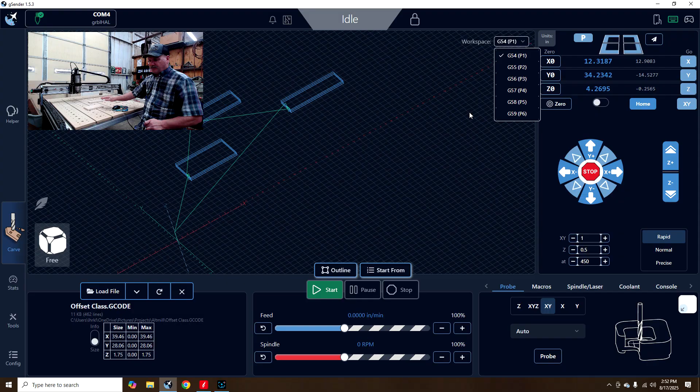And I went ahead and set these all that way. I do not recommend doing that, because if you forget to turn this back to G54 or something, it's just not real good. And my post processor is set to use G54. I do believe in having that called up in your G code, and I'll try to remember to go into that in a minute. But for now, the easiest way to go to a position that you want to use a lot, I have a couple of macros that I've set.

You can use the jog functions to do the same thing, but when you home your machine, you see these gray numbers right over here. Those are your machine position, meaning from home. Has nothing to do with your G54. You set that anywhere on the table that you want to zero that one, which is in this case on G54. So when you home the machine, you just push home.

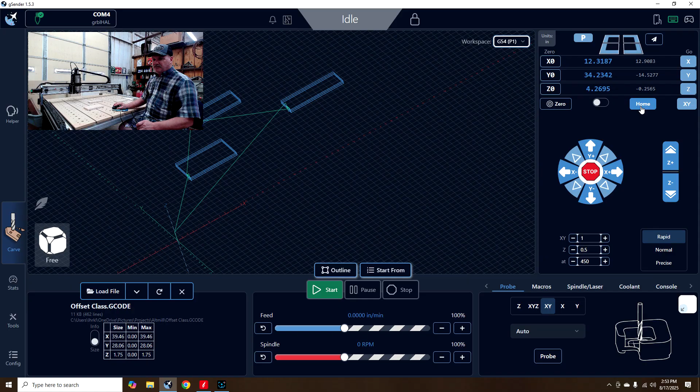I've already done that. I guess I'll do that again and show you. And those sensors may not exactly come back to where they were. Now, everyone thinks that's just super accurate and everything. I've found it to be maybe accurate within 5 or 10 thousandths, and it depends on what tool you have in there.

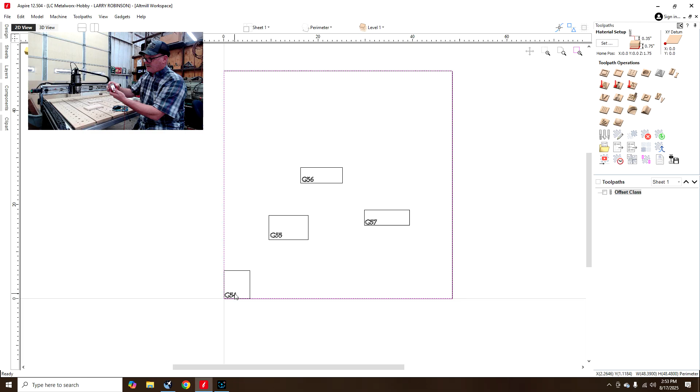I wrote my machine position down here in this lower left. I have it drawn, and let me show you real fast. I've got it opened up down here, and these are the little blocks that I've got set up here that we can call 55, 56, 57 for this example today. And G54 is down here where I was setting the lower left corner, and that's why you use the auto zero touch plate. You can set any of those or check them anywhere you want on this table.

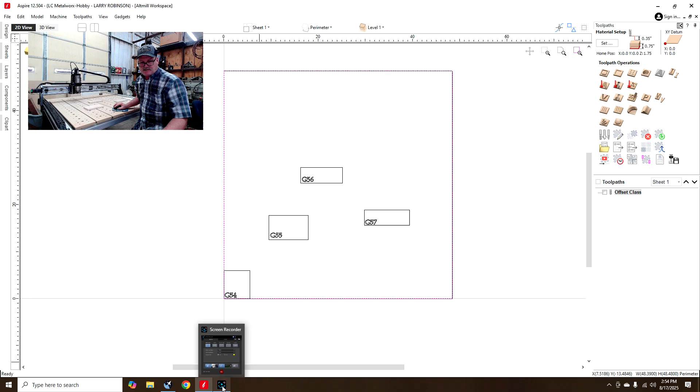And this one here, I already know where this is. But if we rehome the machine, it may or may not come back to these exact numbers, and I'll show you those now. Let's go back to gSender and go through this. Alright, so let's just push home right over here, and let the machine home. It'll normally remember where your zeros are even after you home, even from the day before, but I wouldn't necessarily trust that 100%. So notice when it homes, these gray numbers over here go to 0.

So that is your machine position, 0. So when it's at home, in all three axes right there, those are machine position. Now, I can call a G53, and that will move from a machine position. A G54 will be from wherever you set your G54. Right up here, see where it says G54 and 55 and so on. Those are work offsets. Okay? And that's what your G code is working off of, is your work offset.

Now you could always zero everything right there on your machine. I don't like to be on my limit switches working off of that. Things cannot be right. If you have some soft settings in here to where it doesn't allow you to get close to those areas, you could run into problems. I don't recommend doing that. Some people do, and they use that for their zero, and that's up to them. Everything's up to however you feel comfortable running it. I just want to show you how this all works out.

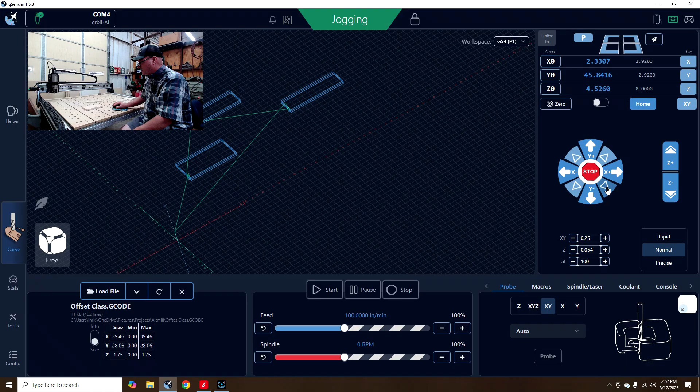48.762. It's exactly what I have written down, so it did repeat. And so you can trust that. So what I would do is just pull this off of the switches over here. I'll just move it, jogging around manually, keeping the Z up to a safe height.

Now I can set macros in here, and I can move to any position I want to if I've recorded these numbers like I have here and written them down. So that's probably the best and the easiest way if you want to move to a position. So in this case, I've moved in here and I just skimmed these around. I made a code to do that, but it was based off of this position, but I still could find those positions. So let me show you.

In this case down here, I've got a macro, so let's pull the macro list up. See the one where I put table 0? And if I click these, I can go in here, and this is where you can write that. It's a G code you write in here.

And I know people don't want to know about G code, and they think that I overdo G code. If you don't understand a little bit of G code, you're going to have trouble with running your machine and understanding how it works. That's just simple as that, and it's very simple to know just a few G codes to do this. So in this one, I'm running in inches. If you're running in millimeters, it's almost exactly the same.

I can tell you the differences, but in this G code I've got G0, which means rapid move. G90 means we're going to do an absolute move. So that means it's going to be an absolute measurement from that 0 up there to here, not a relative from where I'm at right now. So yeah, I'm off there right now, but it doesn't matter. We're going to go exactly from our machine home position, not our G54, we're talking about machine home.

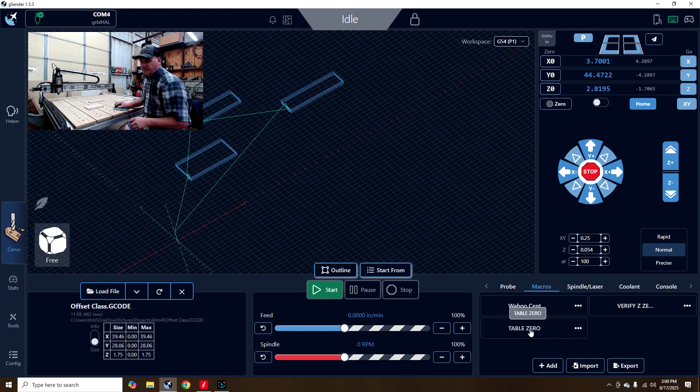Okay, now I'm assuming you can see right here. So I'm going to come down with the Z just so you can see that that really is that position. And I can see it is definitely lined up. The center of the spindle is lined up with that corner.

And if you'll notice, the grayed out numbers from home are exactly what this says right down here, 0.590 and minus 48.762, and we're not worried about the Z. We will set our Z. I like to set it off the spoil board today because I don't want to scratch my spoil board, and so I've already set it on this right now.

But anyway, that's how you move to a position. Set you a macro. Now, just because we moved it here, that didn't set our G54 to be there automatically.

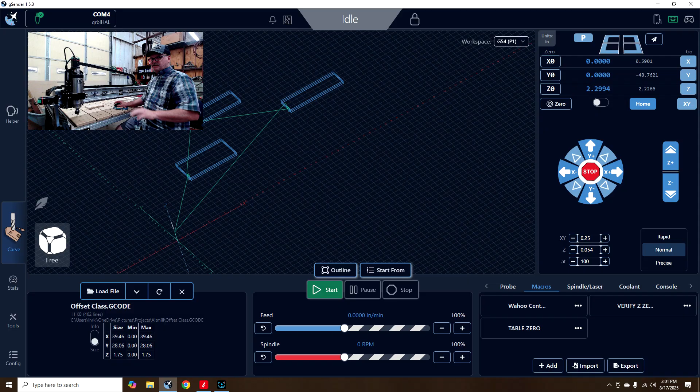Once you move it there, then just go up here on whichever work offset you want to do that on, and go ahead and click your zeros here, X and Y. And we're not going to play with the Z because we've already set that one here. So now we are set. Our G54 is set right here from the macro that it moved to.

So now, since I already set some of these other ones, I'll show you how I did that. So let's go in G55. If you'll notice, these numbers change. So if I wanted to, I could make a macro there, but I don't want to do that. I want to show you how to do that right here. So we're going to set G55.

Now, you can use G55 and some of those just to find, so you don't mess up your zero you set, because when you use this auto touch plate, it's going to set that there. You can come off of it. Just be sure. That's why I don't recommend doing this, because once you change that, you may forget to come back and put it back to G54, and when you turn this machine off, it's probably going to just stay right there the next time you turn it on. So you may not be in the same work offset that you thought you were in. So that's not a good idea in most cases to ever use G55 or any of those.

But for this example, we're going to do this because I'm going to show you how to do all that. So we're going to set our touch plate up right here. Now this is for if you need to be really critical. If you don't need to be that critical, just line it up close to that corner or the center, wherever you want to be, then record those numbers. But let's be accurate today and show you can be super accurate here. So now I'm going to line up in the center here. I know you probably know how to use this, so I'm not going to go too much in depth here. I'm going to show you.

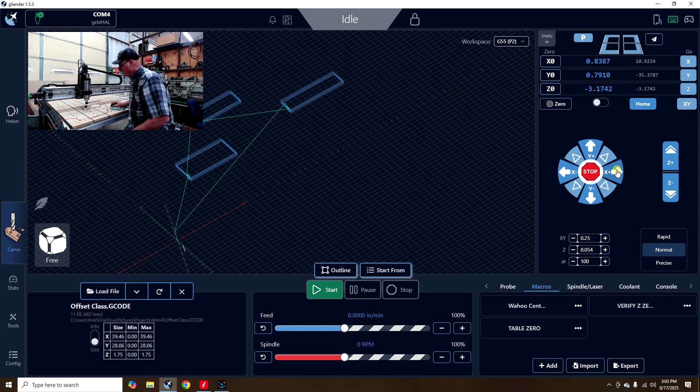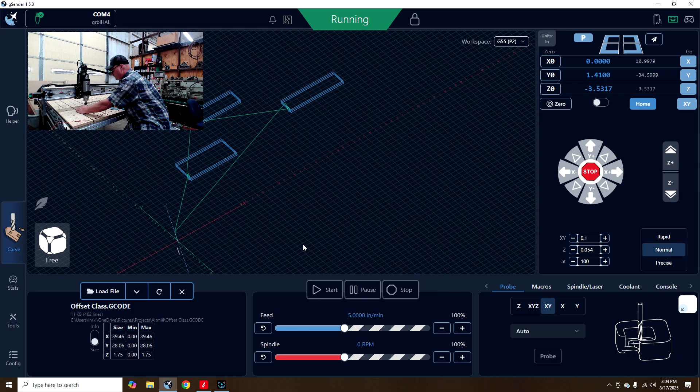Alright, now I'm going to hang on to this in a minute here, but I'm going to probe that corner. I'm in G55 so I can see these numbers. We can also look at these machine positions. So let's push probe, XY probe right there. I'm going to hold on to it and try not to get my fingers pinched. I'm not going to do all of these. It's just too time consuming, but once you've seen one, you can kind of get the hint here. Alright, so we've set that one on G55 now.

Okay. Two things that we've done there that you may want to know. You'll notice we're in G55, and this is the board that I was calling G55. I wrote some notes on here so we can write this stuff down. So now that's X0, Y0 on G55, and you're going to have to call that up in your program unless your program is not calling up a work offset, and mine does, and I like it that way. So I'll show you how to fix that in a minute.

So now see the gray numbers? Those are from your machine position, and just to verify that kind of stuff in your head, see that shows 10 inches there on the X, from home position. You can take a ruler or whatever and just kind of guesstimate about where that is, and see that it's up about 10 inches. That's about where the home is. I know that's right.

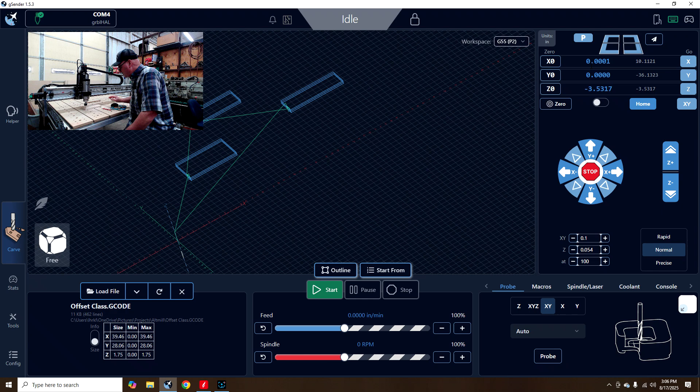It says minus 36 inches. So from the home position back there, which is about the back of my spoil board, that's right at about 36 inches. So I know it's right. I'm just showing you how to do it, but those are ways to verify, and you can see that that is right at the corner of that board. So that's set. G55 is set right there. That's 0 in your program.

Machine position is G53, where you can make a macro if you want to. So let's write down these numbers over here, because I'm going to show you how to do a macro on that. So X says 10.112. Okay. Y is minus 36.

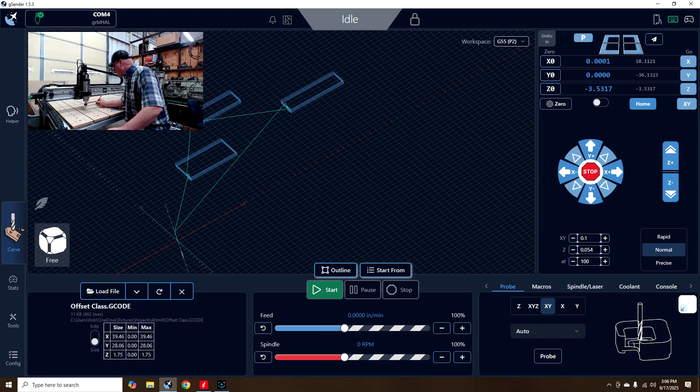132. Remember, that's from the home position back there. Here's exactly where that is. Alright. Now let's just pick this up and move it out of the way, because we don't need that anymore, and I'm going to show you how to do that macro. So let's move this anywhere random. It's moving in a random position there.

Now remember, I told you when you do that, look at the console here, it'll show you some of these G codes it was putting in there when you jog. It put some funky $ sign and different things in there, and that's the controller doing weird stuff. Now that it's called that up, it's going to run in weird stuff, like it's showing millimeters there, X 118, Y 118, feed of 450 millimeters per minute. We're running in inches.

If I was to come in here and put X and Y some positions here and run that, it's not going to do what I want it to do, because it's in a funny mode. That's why you want to pull up your G code to make your machine do exactly what you want it to do. So let's pull up a macro right here, and it says right down here, add. So let's add, and I'm going to call this G55. Let me write this in capital so you can see it better. G55

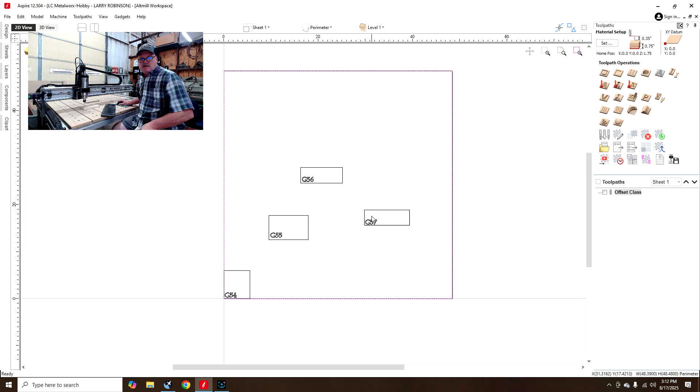So in the case that, let's say, now I like to use this 0 and run, and I just machined every one of these squares from this G54 position. Let's pull this up right quick and show you. This is what I just got done running. See the toolpaths? I named it this because that's what I was going to demonstrate here to you, and the G54 is where I'm just working off of for this.

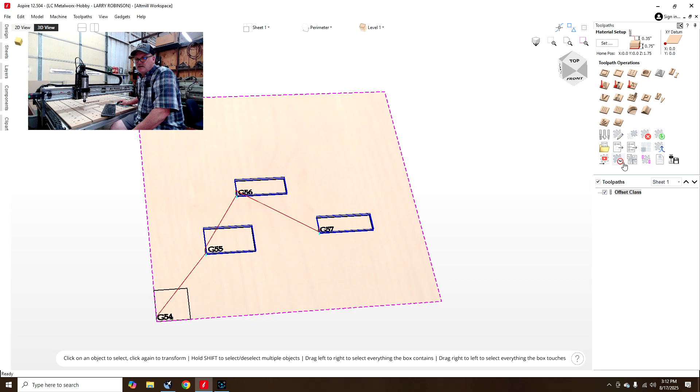So if you'll notice, this is what I just did. I just cut all of these out. I mean, it thinks I cut them out, but I just went around them is all I did, and that was all based off of G54, and that's what I would recommend, that you would always just draw something in.

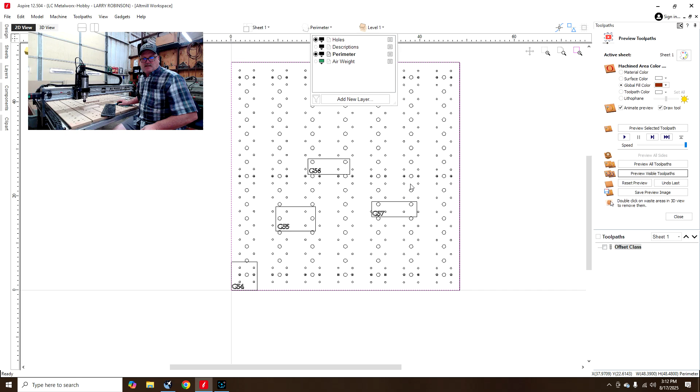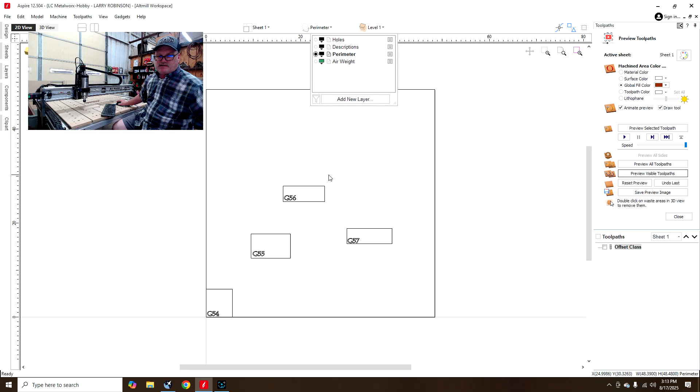Now see, I've got my holes here. Well, that's my table right there. So I save this file in here that I can use and rename it anytime for whatever I want to do, and then I can turn off or on, and turn the holes off. I can set things in here. You know, here's my air weight that I was messing with the other day. You can put anything you want in here, and then here's my actual perimeter of the table itself.

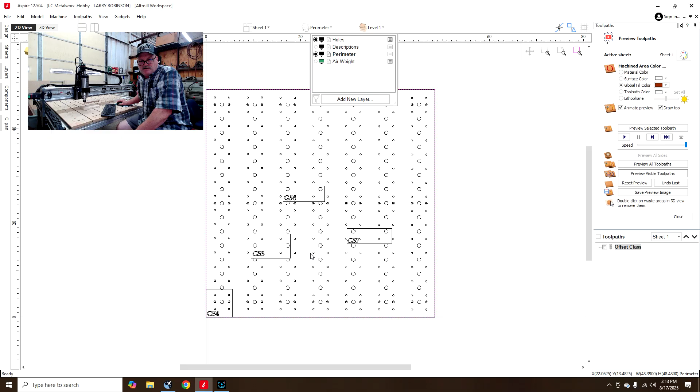I have another drawing that's the full workspace, all the way to the rails, if I need to do anything like that. But since that's all the way already in there, I can hit any hole on here. I can put screws in here to hit any hole I want to on this table. I can see where they are. If I wanted to drill some holes right there, I guarantee you if I drilled those, they would definitely be where I could just put a screw right in there.

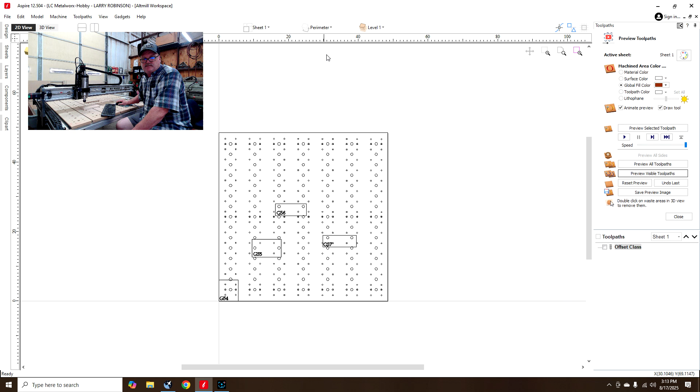Now, I've got double back tape holding these boards down right now, so they're all right. But anyway, that's kind of how I can turn things off. So that way you can just easily grab things and do whatever you want to with those. And that's why I was showing you this. Now you can find these positions here too, but see where I'm zeroed right here? I also drew these in there by finding these positions. So if you look right here, we'll find out what that position is, and it probably changed a little because I machined 30 thousandths off of these.

But if you go over here to where it says move, and you have this on the lower left like that, and in absolute, this shows 9.495 and 12.592. That was the original position of that before I machined anything off of it. But let's just see what it shows down here. I got the wrong thing here. Okay. So if I change this back to G54, it says 9.522 and 12.630.

And let's see where that says 9.495 and 12.592. So that's, wish I could make that where we could see it. Let's compare that to what it is there. So see what this is. I got 9.495. See, so I told you I took about 30 thousandths off of these, and that's the difference you're seeing there now from what we've checked.

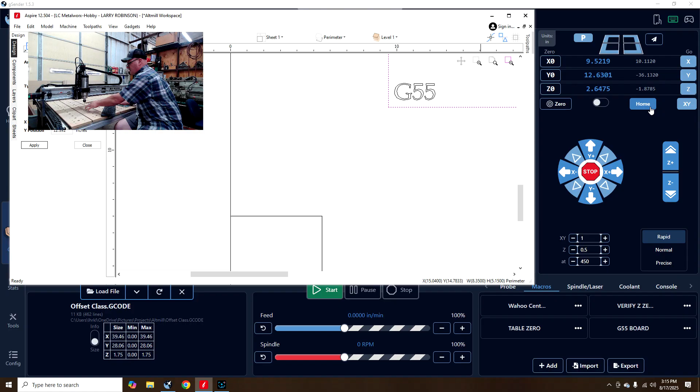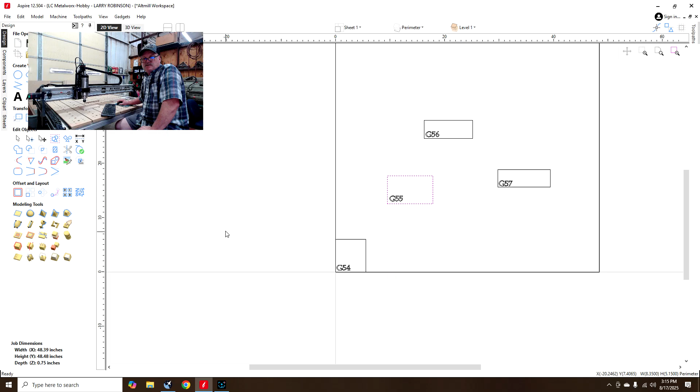But that's how you set those, is you can set those off the numbers you check there, and then you can go in your drawing and you can set them exact position, or find the position from here, or if we wanted to zero right there, we could move this down into this position same way, and we could set those positions that way if we want to. That's the nice thing about Aspire VCarve Pro. This is such a good software for finding positions, moving things to a position that we know. In fact, like that, I just was showing you that.

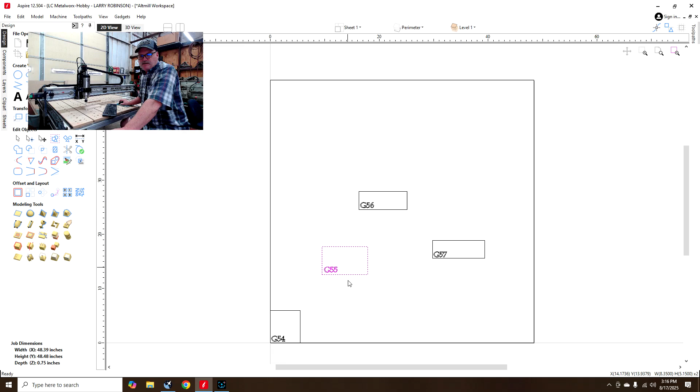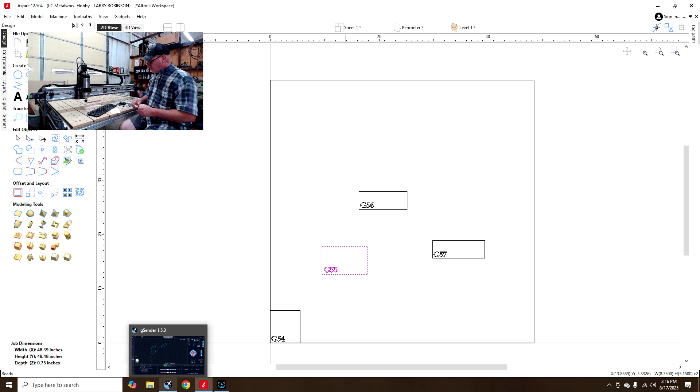So if we want to move that to these positions that we set, we could do that by just saying, look at it right here again. I've already forgotten what it was, so I'm just going to show you how you can do that. So you know where that is now, you can put that one there. So let's go back to move, and we will put, let me jot these numbers down. So that's off of the G54. It's 9.522

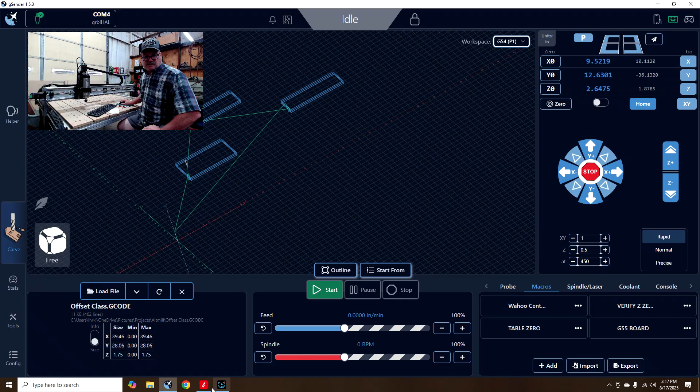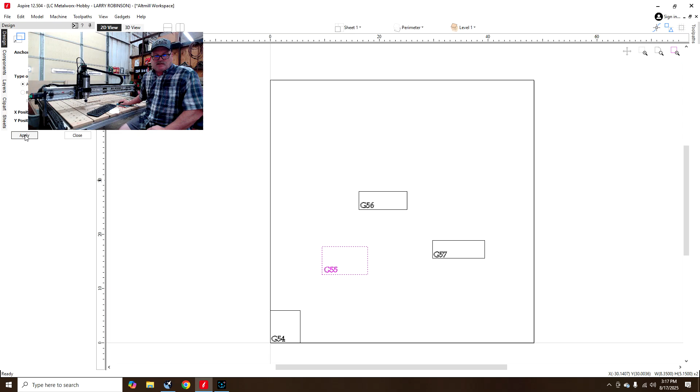and 12.630. All I got to do now is go into my drawing and change these numbers. I'll make sure you're in the lower left right there and in absolute. And we'll go 9.522, and Y is 12.63. And apply that. So now those are in that position exactly where that is now.

So if we want to do any features on this or anything, we can base that off our G54. And that is the method I'm going to recommend that you always do, and you don't play around with 54, 55, 56. All of these numbers, you can still find your positions and move a G53 if you want. If you have a fixture you set up there and in a week or two you're going to get back to it and you want to move right back to that, I don't know why you wouldn't just go ahead and find your zero again like that.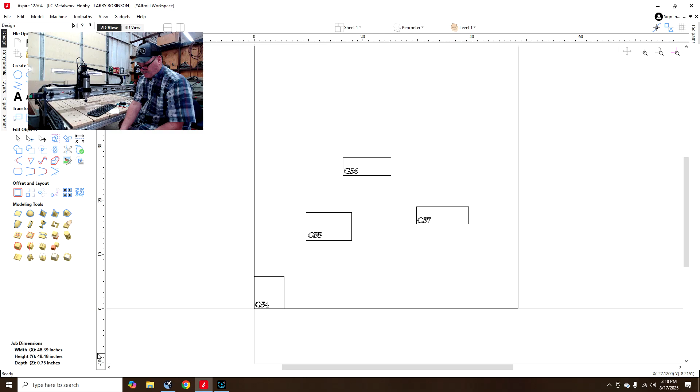But if it's something that's fairly non-critical, like I do a lot of building 4-foot pieces, I have a place that I've got a macro set and I can go right back to them. But anyway, that's how that works. I just wanted to show you how you make a macro, how you move to those positions, and you can do that on any of these boards on here.

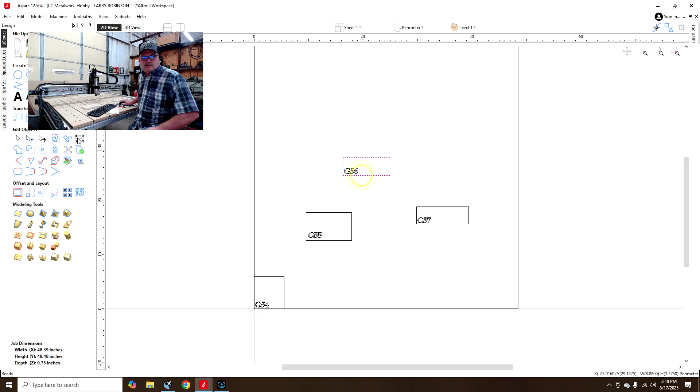I've done the same thing. You know, there's a G56. In fact, I've got some numbers. No, I didn't write those numbers down, but the same way I can use my drawing and pull them up if I wanted to. Same way I could find this one. It says it's at 16.232 and it's at 24.586.

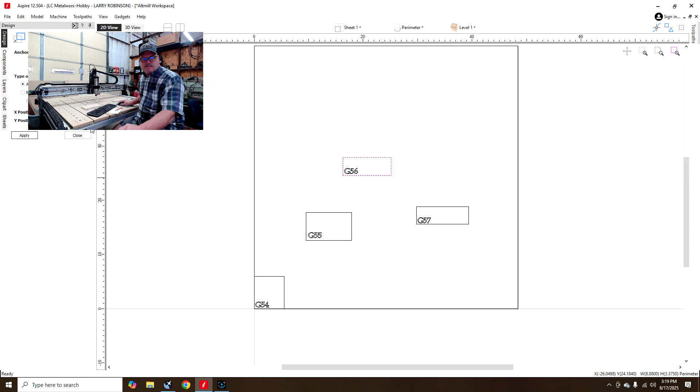So if I want to find that, since I don't have those numbers anymore, and maybe that's what some of you are talking about doing, I could actually go in here and make a macro for that, or instead of a macro, what's probably easier, you could even put it over here. Let's try that since I already showed you how to make a macro. I was just going to write one from G54 to there, but you could also

go home. See that XY right there? Now again, make sure your Z is up in the air so it's not going to crash into something. Push XY and move back to your home position. I'm talking about G54 home, XY0 right there. And you could either make a macro now with these numbers I wrote down from that drawing, or you could put that in your jog feature here. So see these jog positions?

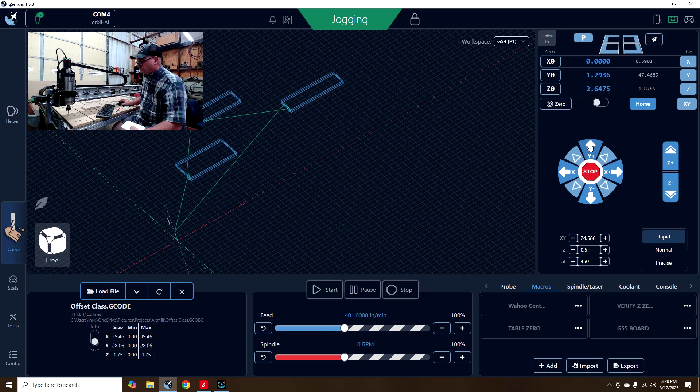Since I know from that position in the drawing, it was 16.232 in X. Let's move the Y first to get it out of my face here. 24.586, so type 24.586 right there in the XY jog. Now let's move the Y up there. And now let's move, because the X needs to be at 16.232. See, we're still at 0 up here on our G54. Now we're going to move 16.232 in the X direction.

And there we are. We're right at the same place as if we had put a macro, or you can look at your drawing and move to those positions that way if you wanted to. As you can see, we're right there on that corner of that board. Now I've showed you how to do it with jog. If you want, we'll raise this thing back up, move to some random place, and let's do the same thing with a macro.

So if you want to add a macro, we're calling that one the G56 board, but we're not going to use it. So I'm just going to name this G56 board, and let's just say move. Move to 56. This is the description you can go in and look at to see what it was all about. And I'm going to put 56 from 54. Okay. So now we're going to write the code.

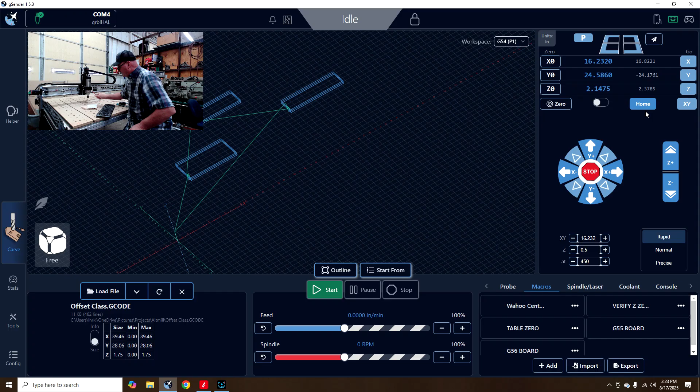If you'll notice, up here in the gray are your coordinates from machine position. So if we had written that code based on G53, we would have had 16.822 and minus 24.176. And we can go back and say, okay, I don't want to base off of that. I want to always base off machine 0, because it doesn't change. It's always back there. G54 may change around the table. So in most cases, it's not smart to use your G54 to pull macros from, because that could be all over the place.

So now we're just in some random place here. Let's go in and fix that macro on the G56. So touch those 3 little dots there to go in and edit that. And all we need to do here is change G54 to G53, and then change these X and Y positions to what we just wrote down, which is 16.822.

Got too many ones in there. 16.822, and the Y was at minus 24.176. And now we've got G0, G90, G53, G20, and all that in there. I didn't get my decimal in there. That would have been a disaster. Make sure you're getting your decimals and your negatives and everything in there.

Now we're going to update that macro. And now when we go down here and hit that, we're going to be based off the machine 0, but we're going to get to that same place either way. Okay? So there you go.

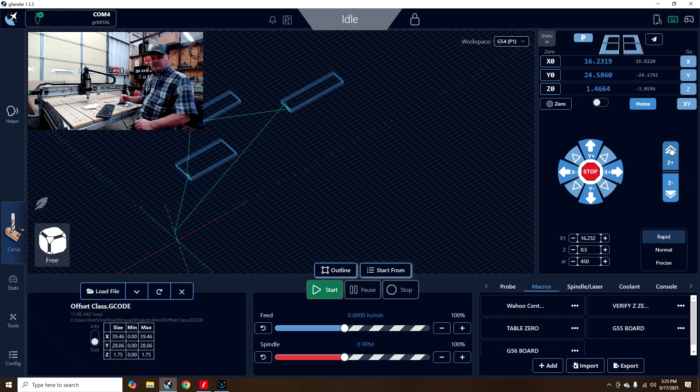I hope that's been helpful to somebody to help you think about what these machine positions mean and what work offsets mean, and why it might not be a good idea to be using G56 and 7s and all these numbers, because there's not really a reason to be doing that, because you can pull a 0 from anywhere you want. I could pull a 0 from this hole if I wanted to and do anything on this table. You can set your 0 anywhere you want.

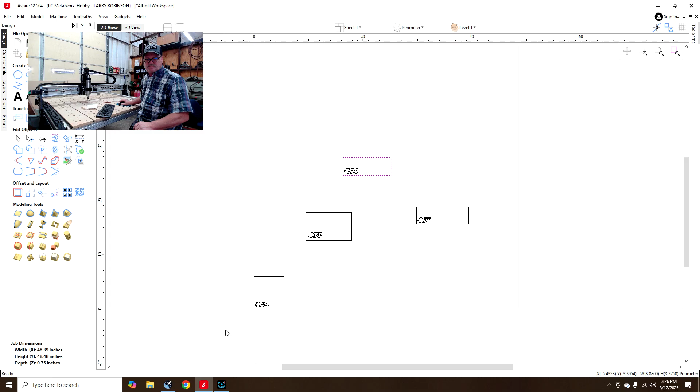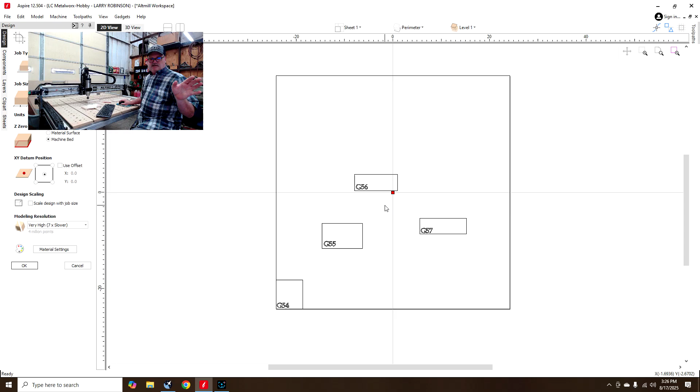It's just that in your drawing, when you make your G code over here, you've got to be based on wherever this 0, see this, where you've set that up over here in your job setup here. When you set where that's at, see it says lower left. If I put that in the center, then it's going to move the 0 to here, and everything we just set is no good. You have to be set in your drawing when you make a G code.

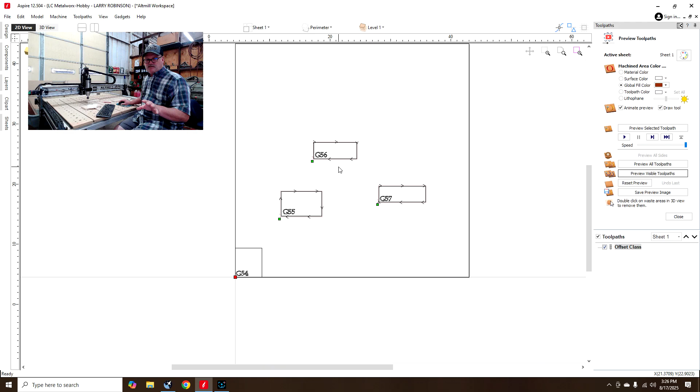And then when you create your G code, now I want to show you the G code that I created off of this earlier, why it's important. If I was to do a G56 0, I would definitely need to have that written in the G code, and you can edit that real easy. So let's go in here and find that G code, and I believe it's right here. All right, here's my G code.

So if you'll notice at the first of my G code, and this is the way I've got my post processor created, and that's the ones I've added into the AltMill file section. You're welcome to go in and use any of the post processors that I've edited, and I have a video on my YouTube here too showing you how to go in and set that. But I've got G0, G90, G54, G17 and G20 as my startup code here.

And so if you was to use a G56 work offset and then you make your program, it's not going to work because of this G54. All you got to do is pull this G code up, come in here and change that to say G55, whichever one you used, and then go File, Save, and now you can run the code as long as that's the only place, and in this code there's nothing else.

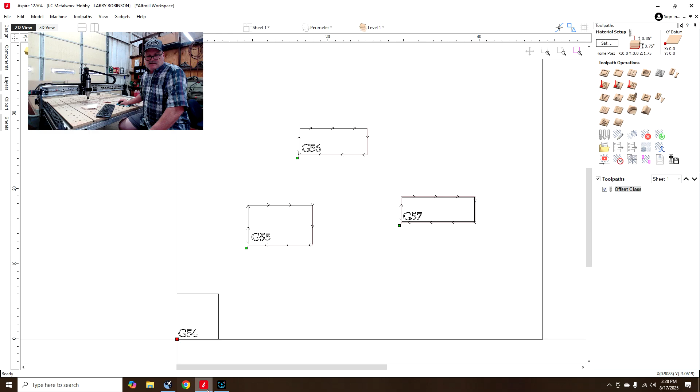But just be careful. You could go in there and just remove that altogether, and it's going to just probably use what's in your controller. It's again a little dangerous to me, and I like to be able to know what the G code is going to do. So let's close this, and we'll go back in and open that back up, and you'll see that it's going to be all over the place because I don't know where we're set. But see, that's in G54. But it's not going to matter because our G code is going to pull up.

So let's close this file, and let's go back and open it back up, the one we just saved. And so it's probably, well, it's still showing to be based on that, because I guess for this to be able to see it, we're going to have to write G55, and maybe to do that you have to close the file and open it after you've changed this. I've never done this because I don't think it's a good idea. If we set that to G55 here, okay, let's see what it's going to do if we load that file again.

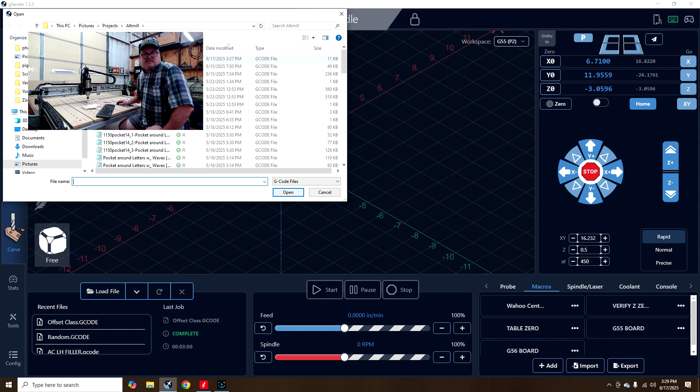And I think it's just simulation is what it's seeing. It's still going to run the G code correctly even if you don't mess with this. But this is... see, now it's showing. I really don't think the simulation is reading this right, because right now it thinks we're at 6 inches,

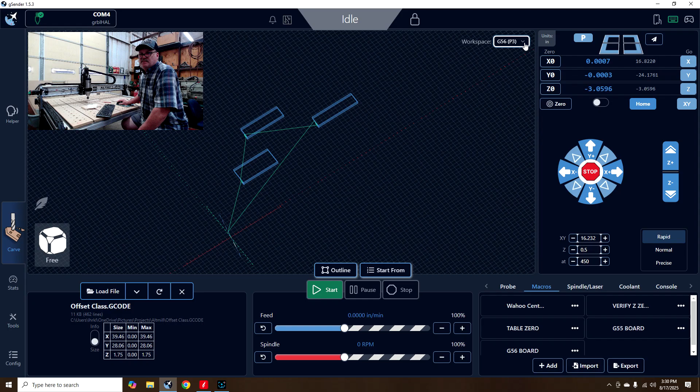and we told it G55, which is, we may have set G55 over there. See what it looks like if we do a G56, G54. See, that's not changing nothing. So let's see where G55 moves us to. Oh, it moves it from there.

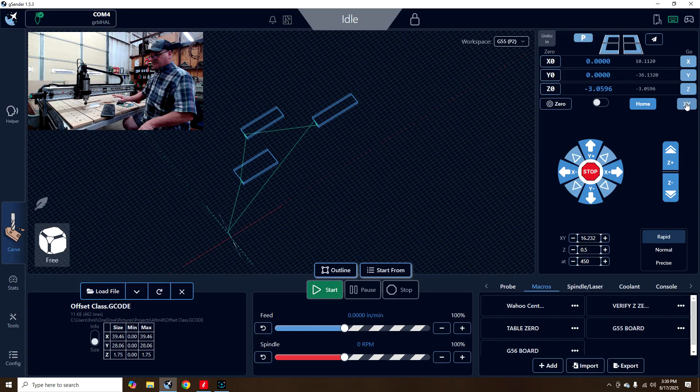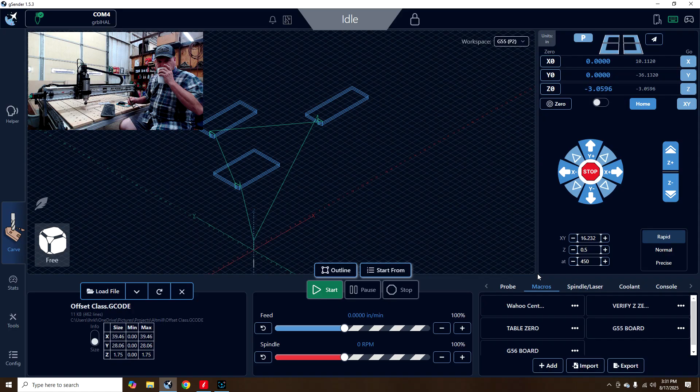So as you can see, this program is going to shift everything way off from where it really is, because we're just not right when you do that. So that's what I mean. Things are not so cut and dry if you don't base them off the same work offset like the G54. You're really looking for problems unless you really know what you're doing. You can do that, but I'm just here to tell you, you're looking for problems playing with G56, 7, 8, whatever you want to do.

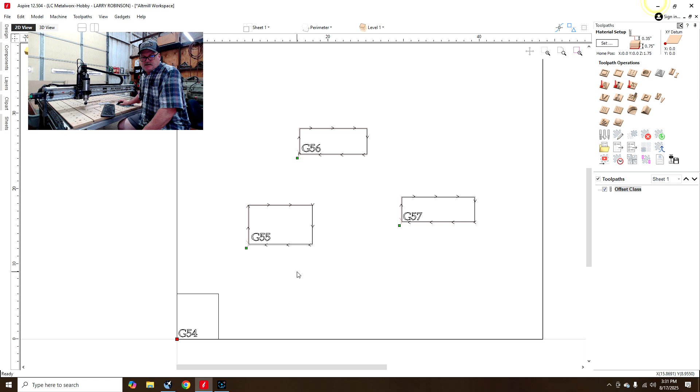And yeah, if it was a quick job and you just want to do that, I know you can do that, but believe me, you may not think you will, you're going to mess up. And if you just come in, lay something in here, set a 0, so let's just say that none of this stuff was even here. The way you would normally do a job, as you know, is you would just say, I'm going to run this job right there, and I'm going to set my 0 right there.

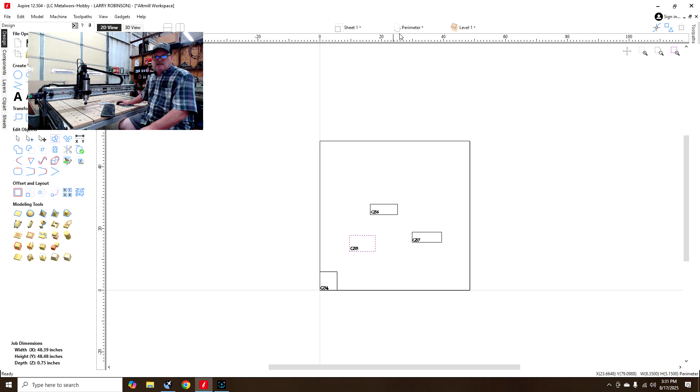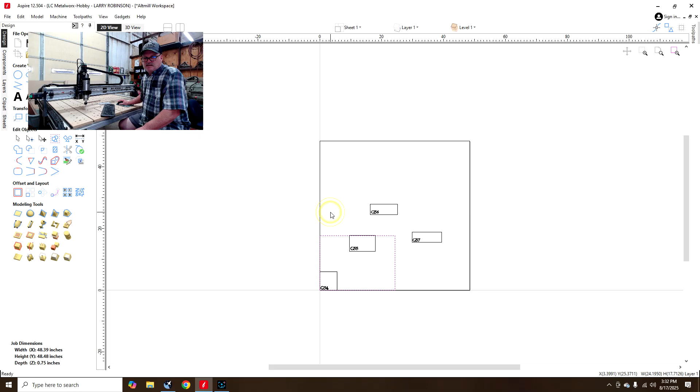So let's turn off all this stuff and just draw something from scratch. So normally you just say, okay, I'm going to draw something like this, and then I'm going to have to move that to a new layer. Are we even going to be able to see what we're doing here? But now I can turn off this one, and we got that. Okay, normally you're going to say, I'm going to draw that in my 0 point right there like that. And then I'm going to do whatever.

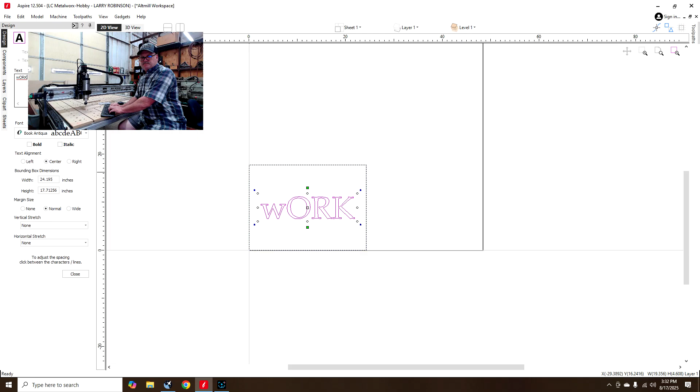Let's just say we type in something like this, and I gotta do something like that, and then if we want to be sure that's centered in there, we can do this. Now it's centered in our work deal, which is not what we want, so what we want to do is select this and then go like this. Then you'll just say, okay, maybe I'm going to cut that out, whatever. But anyway, you know what I'm talking about. You're just going to set something, and you're going to V-carve or whatever you're going to do with it.

And we'll just make up something and calculate that. And then that's how that's going to work. And then you're going to preview that, and there you go. That's how you're normally going to do it. You're just going to set up one job and do it based off whatever 0 that you're using, and that's all there is to it. But I don't know if this is useful to you. Anyway, I just wanted to talk about it.